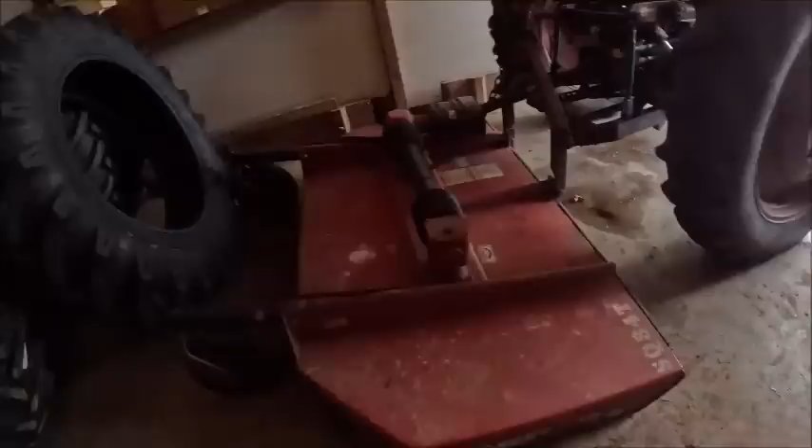Hold on. Okay, I need to get that thing out of here and get it over to my house now that I got room, and then obviously the best thing to do with these tires is get them on the tractor, but we need decent weather for that.

My original plan before the snow happened was I was going to get the mower put on this thing, get that taken care of, and then run it home, hook on the grain drill, and pull the grain drill back. Well, now with the roads wet, I don't want to pull the grain drill over there or over here with the roads wet, and I don't want to take the mower over there with the roads wet and have it wet and rusting. So probably not going to be doing that today, so I'll have to figure out a way to stuff it back up in here all hooked up for the time being.

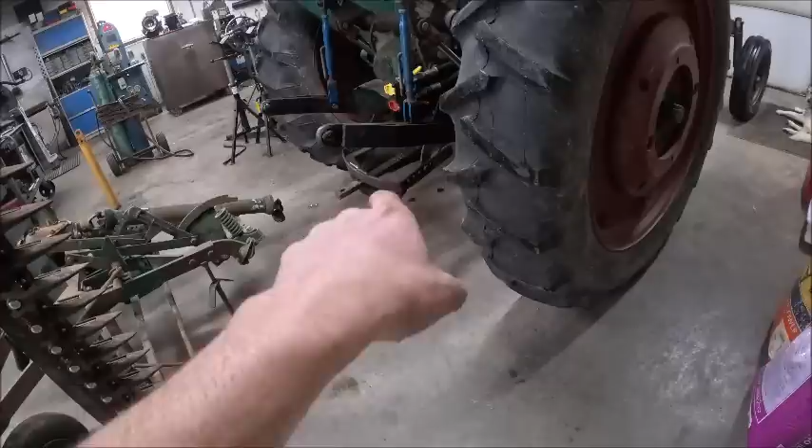Okay, so hooking this up to the tractor is pretty straightforward, although I think I'm going to have to make 2 changes on the tractor in order to make this work. I think I might have to move the supports back for the drawbar cradle and level the drawbar out, because right now it's tipped down.

And then I think I'm going to have to, right now, and I don't remember the exact situation why it ended up that way, this has a drawbar in it out of a 60, and it's shorter. Do you remember why we changed the drawbar in this thing? I know it came out of that 5-speed.

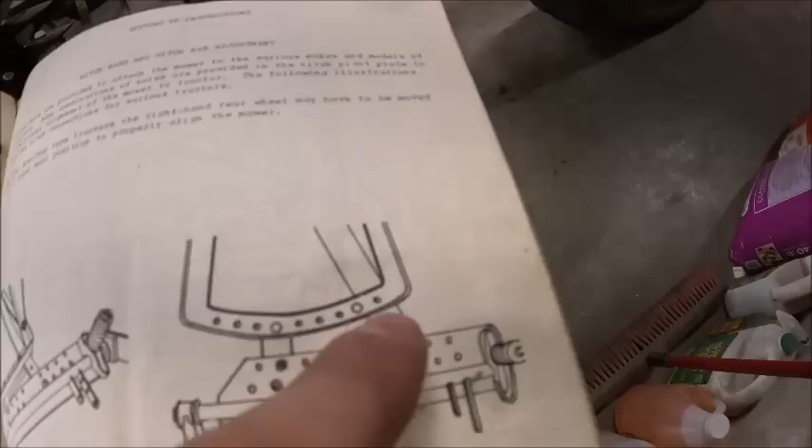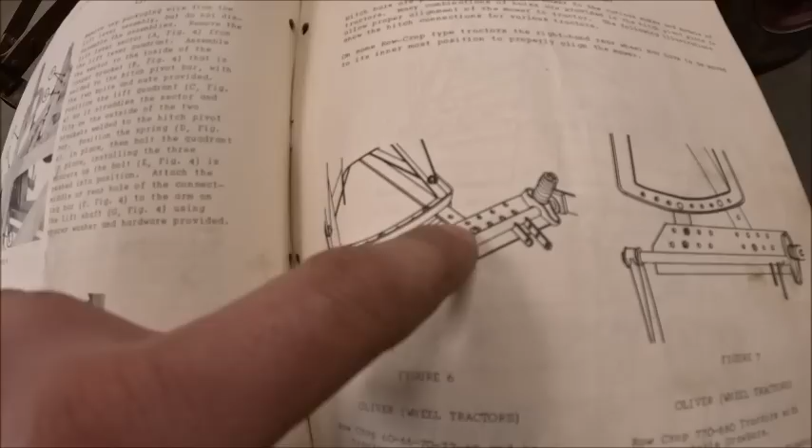But I can either take you on the 66 and show you, or I can just go get, I think that Super 88 we got's got a drawbar in it that I can throw in it. But if you look here on this illustration, the drawbars on the Fleetlines and the Supers and the 3-digits had 2 holes in them because there was an option for a hammer strap on these drawbars. Don't really see it, but there was an option. And the drawbar is longer.

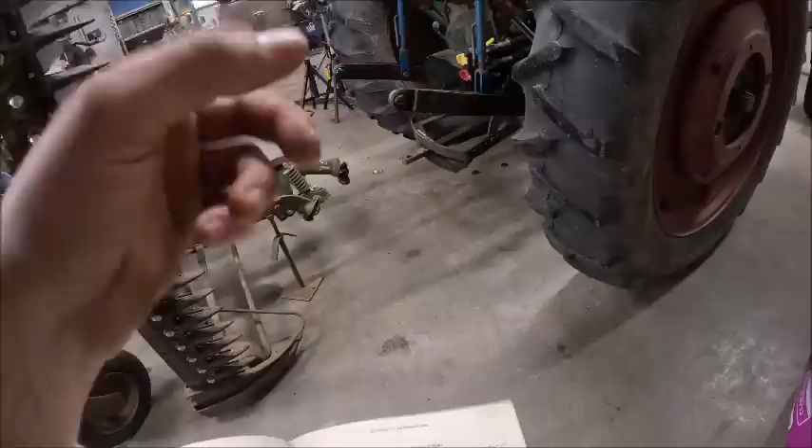So in order to get the mower straight in line with the tractor, you've got to have the right drawbar in it. So I'm probably gonna have to throw the right drawbar in it, or I think that Super 88 we got has a drawbar in it. If not, that Super 77 we have should for the time being. So I'm probably gonna have to throw the right drawbar in it and get the cradle leveled out.

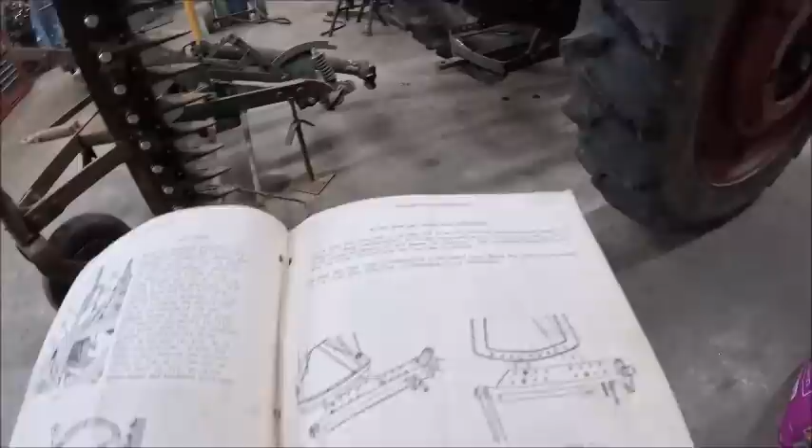But this is how it's set up for the Fleetlines and Supers, and then the 3-digits have a different setup, which I believe the 3-digits had a wider drawbar strap, and then they had more holes in the drawbar, so that's why it requires a different setup. But they got all sorts of stuff.

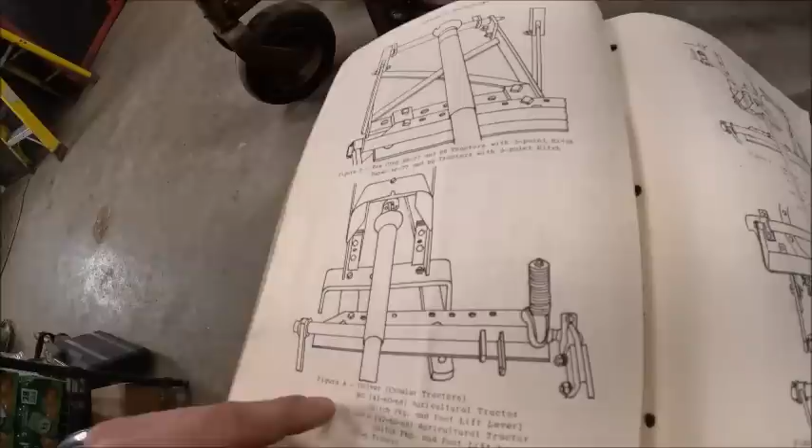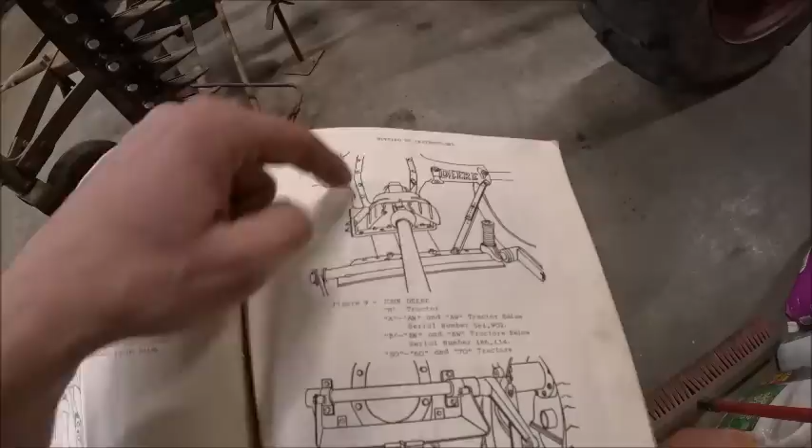There's a setup for the Fleetlines and Supers with 3-point, HG, OC3, OC6 crawlers, John Deere's — I'm assuming that's... well, it says all this stuff below serial number, but then 50, 60, and 70 tractor, but that looks like the back of an unstyled Deere. So you wouldn't think that would have a whole lot in common with a 50, 60, and 70, but apparently it did. Allis WD, Allis CA, Farmall Super C.

Well, John Deere A and B, BW, I'm assuming that's the styled A's. Oliver Super 44 with a swinging drawbar.

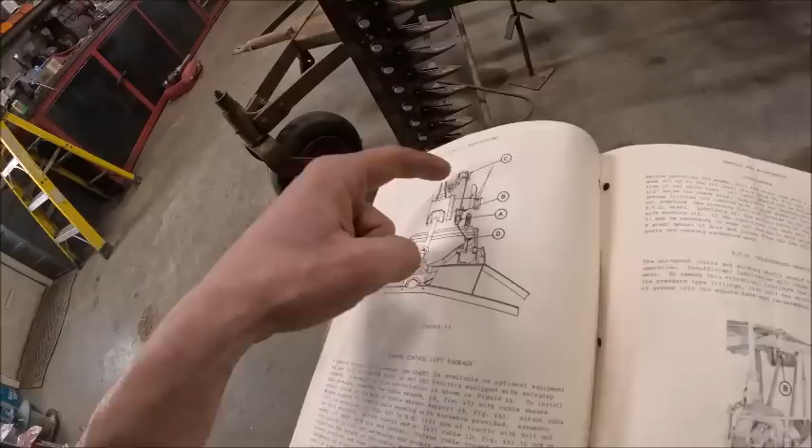And then that's a Super 50, that's the remote lift for a Super 55. Basically, you took the 3-point apart and used the rock shaft. It had a bracket they put on it that ran a cable back to the lift, and you used the 3-point rock shaft to lift and lower the mower.

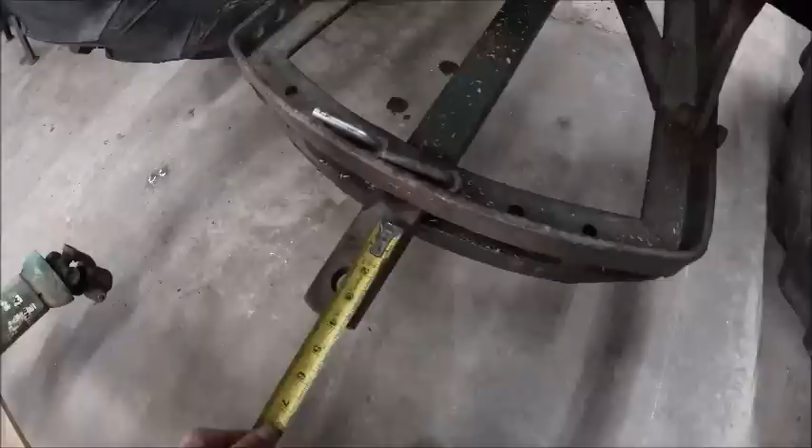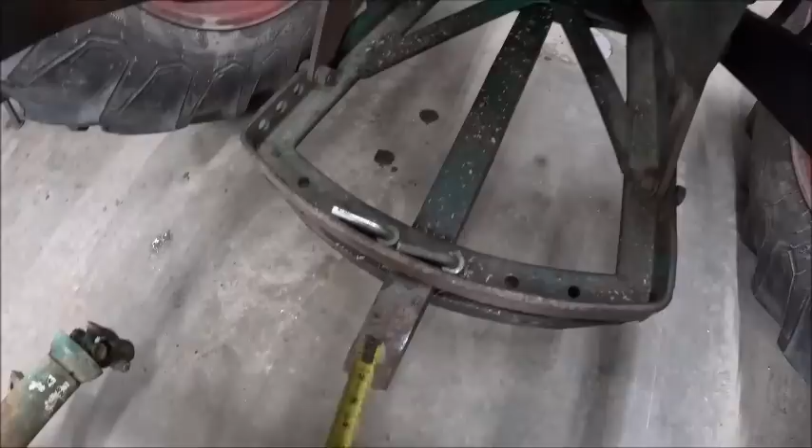But anyway, that's what we got to do first, is get the drawbar in this thing situated. So for illustration purposes, the drawbar in this one is basically the tip 5 inches behind the cradle. It actually has a position in it. You can slide it in one hole, and it basically puts this hole right here.

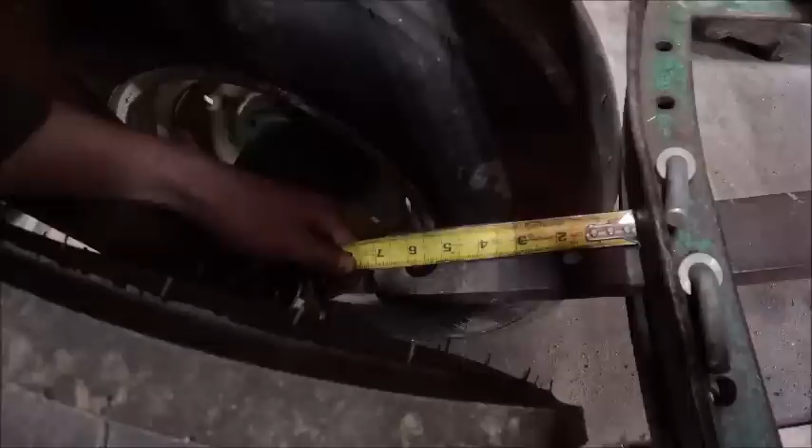So now I can go show you on the 66. It's kind of hard to get in here because of how I parked it, but the drawbar on this one is like 7 1/4. So you're basically 2 inches longer on that drawbar.

Unfortunately, that Super 88 did not have a drawbar in it, just the cradle. So I really wish I knew where the actual drawbar for the 77 went. I know we wouldn't have got rid of it. I'm pretty sure we threw that one in there for something to do with tractor pulling.

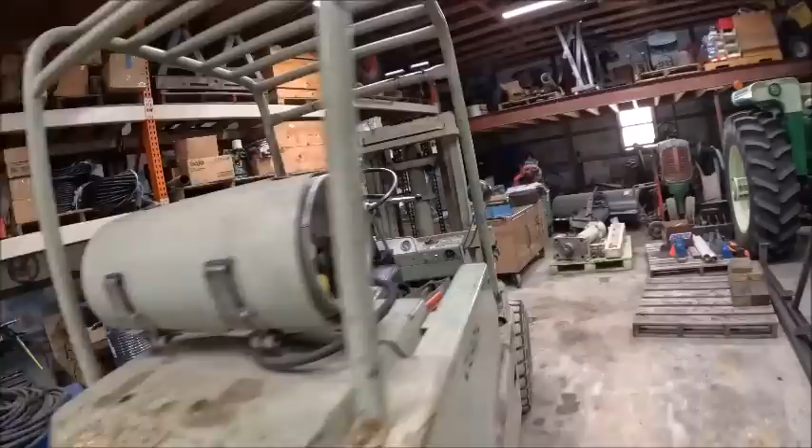So if nothing else, it might be a little bit of a chore, but I should be able to get one out of that Super 77 back there for the time being.

Well, hell, that wasn't even hard at all. Apparently we had pulled the pin in it and shoved it into the cradle to get that thing closer to the wall, so there wasn't even a pin in it. I just had to reach up in there and slide it out.

One of these days we'll get that tractor going. One of these days. It needs to move up on the list, but unfortunately it's a long list and there's more important stuff in front of it.

Okay, so I got that Super 77 drawbar in, and I got the cradle leveled out. I just had to move it up, or move it back one hole. So with the drawbar set up, swung over like that, we should catch in the drawbar that bolt hole, that bolt hole right there.

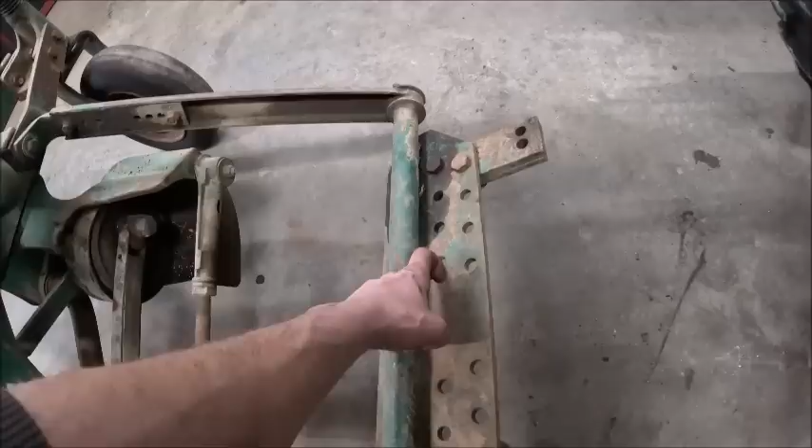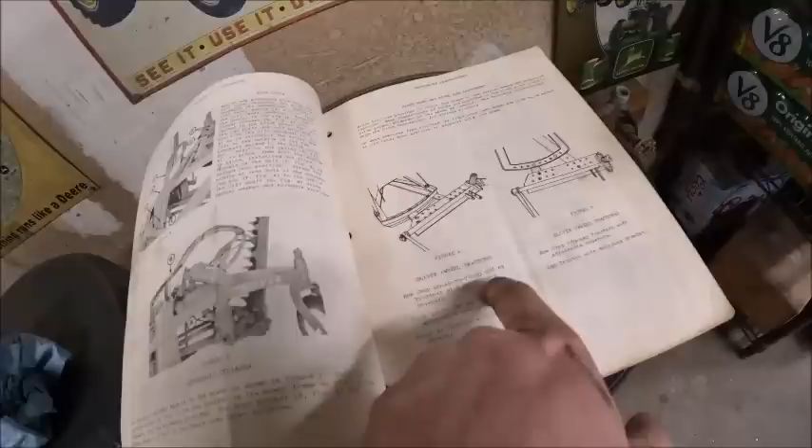And then this is already where it belongs, which he ran this on, I think they ran it on their 80 and I think they ran it on their 77. So in theory, it's pretty much set up the way it needs to be, because actually the only tractor it doesn't mention here is an 80.

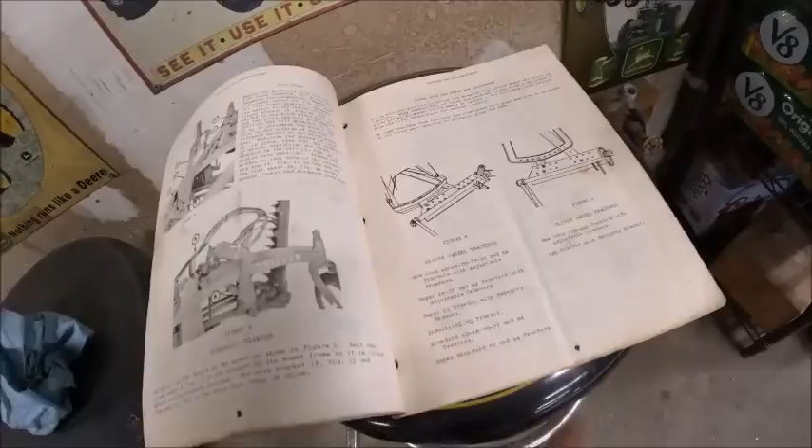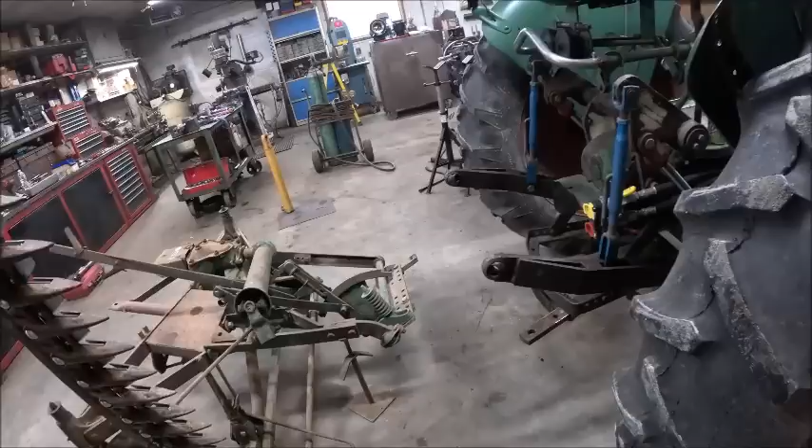Interesting. 60, 66, 70, 70. Oh, right there, 80. Okay, yeah. Because in theory, other than pitching the bar, since tire size is going to make a bit of difference, once this thing's set up for this, it should fit a 60, it should fit a 66, it should fit a 70, any series that uses this cradle or this drawbar. If you put it on a 3-digit tractor though, because they changed the drawbar cradle and everything, you'd have to move that bracket. But once it's set up for this, it should fit a Super on down.

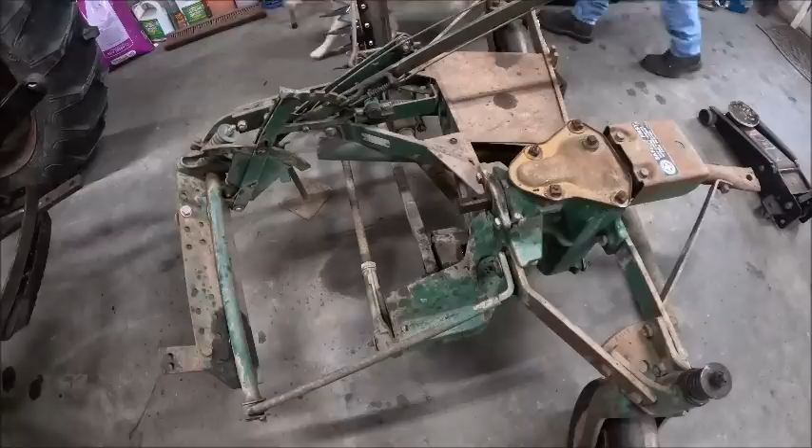Well, I decided I was going to take the PTO shaft off just to have one less thing to juggle on this pool noodle while trying to hook it on the tractor. And I was like, surely it can't be that hard. The pin moved and everything. When I started driving it out, it went like 1/8 of an inch and jammed. You drive it the other way, it'd go like 1/8 of an inch and jam.

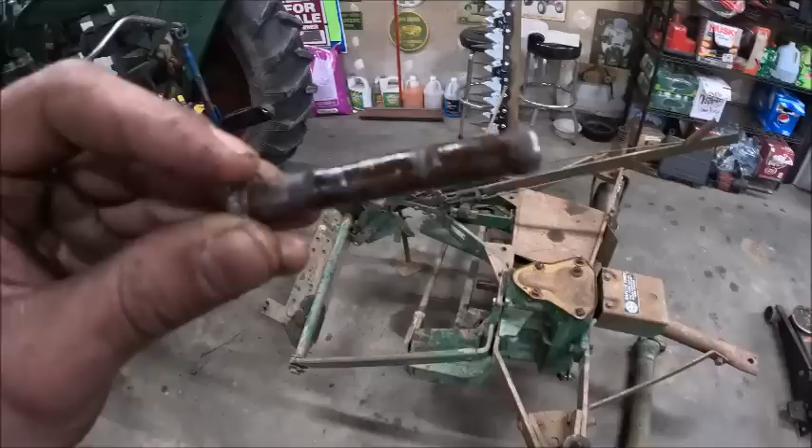Hold on, which way is it? It was trying to shear the pin, so it'd go far enough that it'd wedge itself. And man, I'm starting to sound like I've been smoking 2 packs a day for the last 20 years.

So you have to replace that pin. But I think they just had this in there with a cotter pin in it like normal. I think when I put it back together, I'm going to put it in with an R pin, so that when you do park this thing, you could pull the pin, take the PTO shaft out, set it aside, because this thing is a bear to hook up, and not having the PTO shaft in the way just makes it that much easier.

Anyhow, I'm going to go get me a snack and then we will continue.

Okay, so this part, hooking up a mounted mower like this kind of sucks no matter what you do, but it's not as bad as it appears normally when you have more room. Hold on. So I'm trying to make do with the room I've got here. But basically all I gotta do is scooch her over a little bit because we're too far this way.

Okay, that kind of helps steady things a little bit.

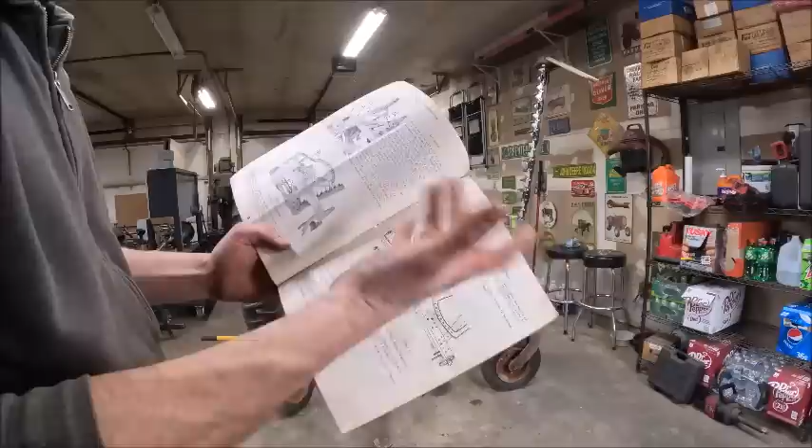So we need to be in the third hole over in the drawbar, or the third stop hole over in the drawbar cradle, right there. So it's just a matter of shuffling around until you can get it where it needs to be, which sometimes is easier said than done if these drawbar cradles have been pinched shut at all. Hopefully we don't run into that issue.

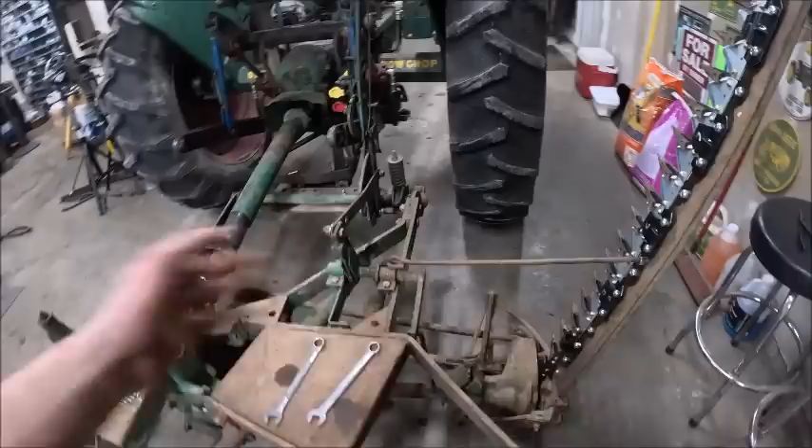Right, so before we take this thing out and lay the bar down and start checking squareness to the tractor and whatnot, I want to get it. Man, I wish my voice would come back. It wasn't this bad this morning.

I want to get more lift out of the cutter bar, because right now when the bar is laid down and you pick it up, if it comes off the ground yay far, I'd be impressed.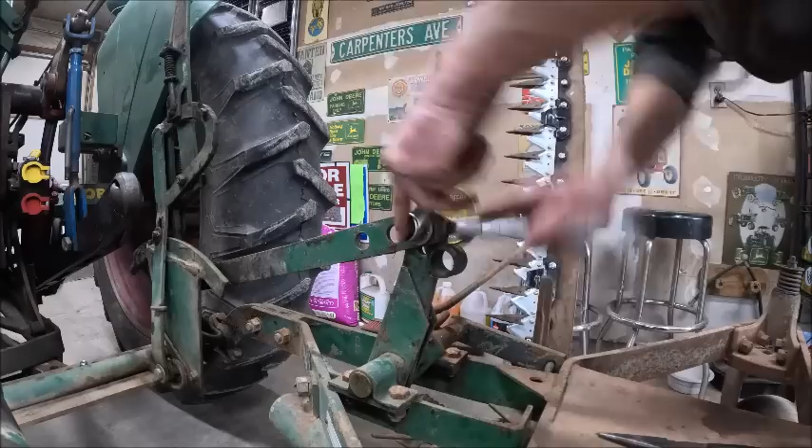Although this is probably all for nothing, because I think what I'm actually going to do, since I know where there's a parts mower that has the parts I need, I am probably just going to end up converting this thing to hydraulic lift.

Not really because I think there's anything wrong with the hand lift, but especially here on the 77, we've got all the stuff in the way on this side for the 3-point. And there's just a lot of knuckle knockers.

So making it hydraulic would make it... I don't know, on one hand it would make it handier, because then it really wouldn't matter which tractor we put it on. There wouldn't be anything to necessarily interfere with the lift linkage anymore.

But then you would have to have it on a tractor with hydraulics, because right now with this, I could put it on a 60 if I wanted to, or I could put it on the Hart-Parr if I wanted to. Not that you're going to want to take a steel wheel tractor out in a hayfield, although technically it would aerate it and mow it at the same time.

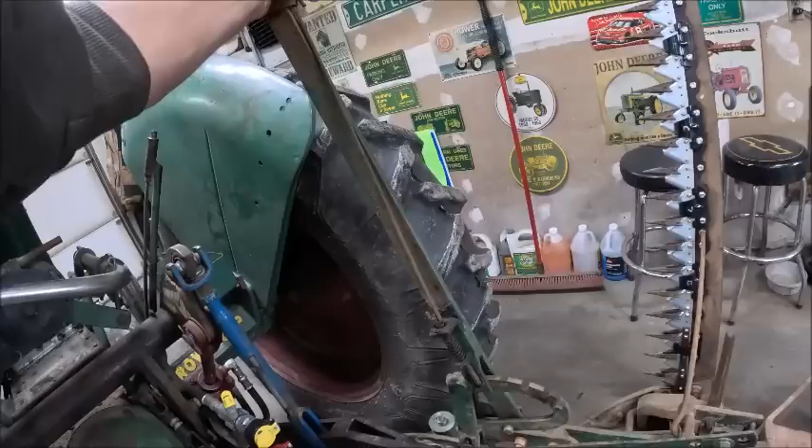I could put it, if I really wanted to—I think you could even, because of the way they design this lever, you've got this adjustment here so you can adjust where the lever is in relation to the seat on the tractor. And then you've got your actual main latch that raises and lowers, or that latches the bar in the up position.

So I think there's actually enough adjustment in that, if I really wanted to, I could run it on the Super 55 with the hand lift. But ultimately, I just want to get a remote valve set up on the Super 55 anyway, so.

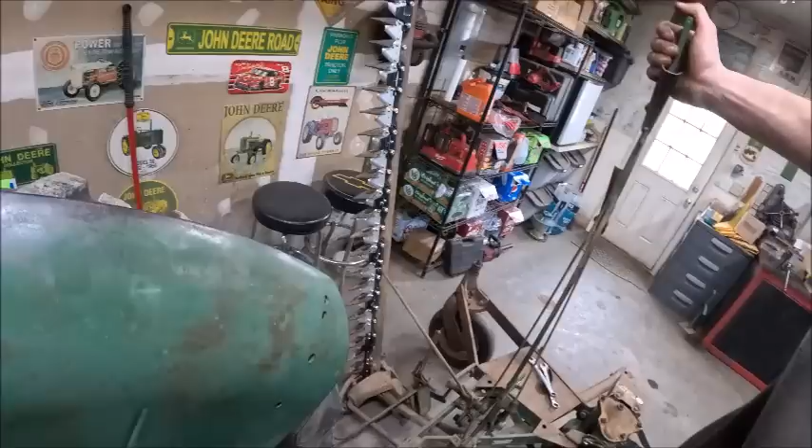Okay, what are we hitting? Huh. Interesting. So apparently there is something in the linkage that physically won't let it come up any higher than that, because I'm coming up against something hard. Actually, it looks like...

Sure as shit, right there at the bottom, it takes all of the stroke out of the lift assist spring. So at that point you're trying to compress a tension spring, which doesn't work. So I guess my lift height kind of is what it is, and I guess we'll have to play with that linkage down on the bottom and get it to where it picks up the end of the bar more.

Because my big thing is, when you turn it on the end rows, I don't want it to be dragging. I don't want it to be obviously dragging hay.

So yeah, I guess I'll put it back where it was. Well, I guess we don't have to really mess with how high the bar picks up, unless I just didn't have it. Unless the drawbar on my 66 is a notch lower, because when I had it on the 66 to take it over to my house, the end of the bar was right down here, but that right there is just about perfect.

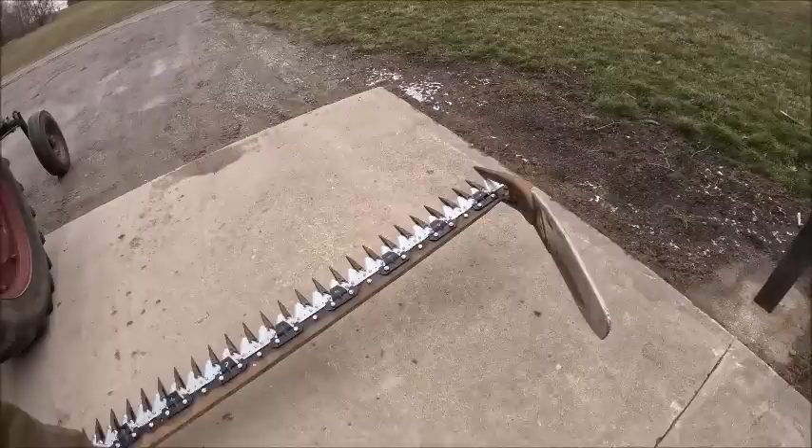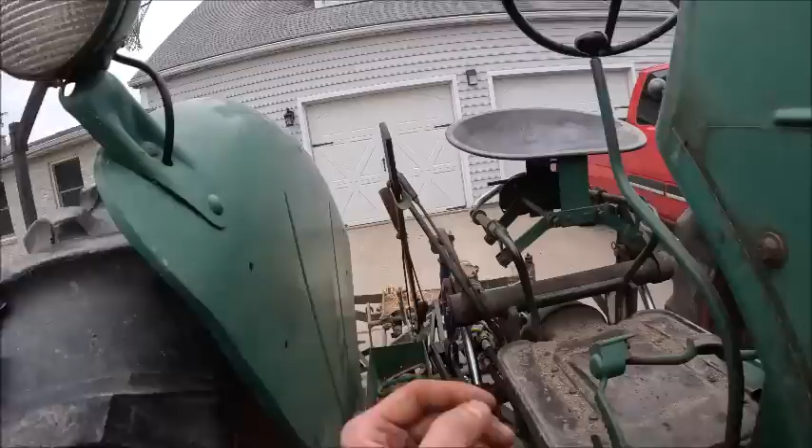So anyhow, basically now what we want to do is make sure that the lead angle, meaning the relationship of the bar in relationship to the tractor, is correct. And the book calls out for, on a 7-foot bar, a 2-inch lead angle. So basically what we got to do is, first things first, set the bar down.

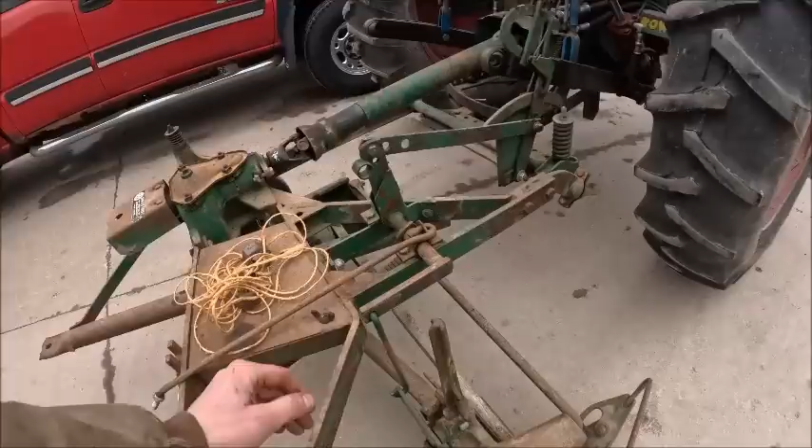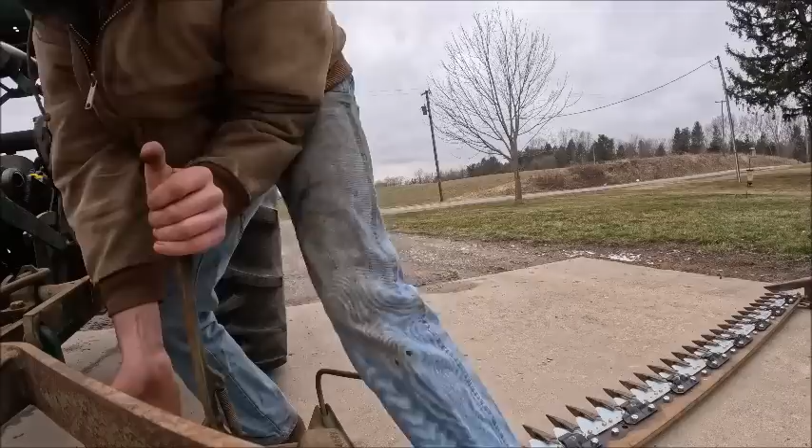And it looks like I need to tilt it forward just a hair. This adjustment's a little stiff. Come on, damn you. Well, it was stiff, but it wasn't. Oh, wait. It's because I'm doing it wrong. Hey, look at that. Okay.

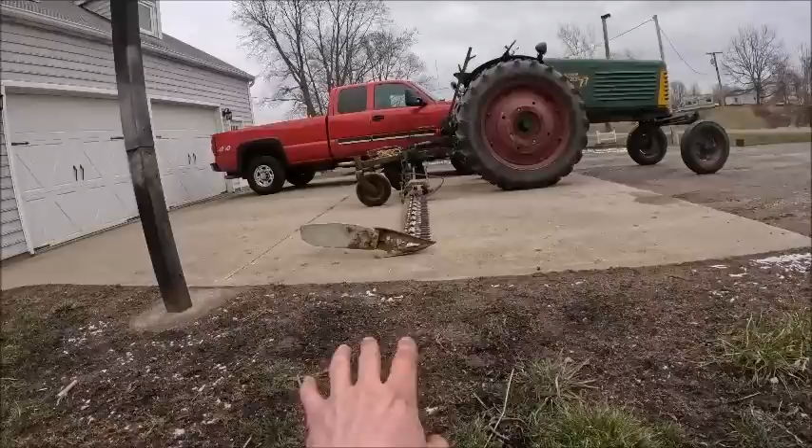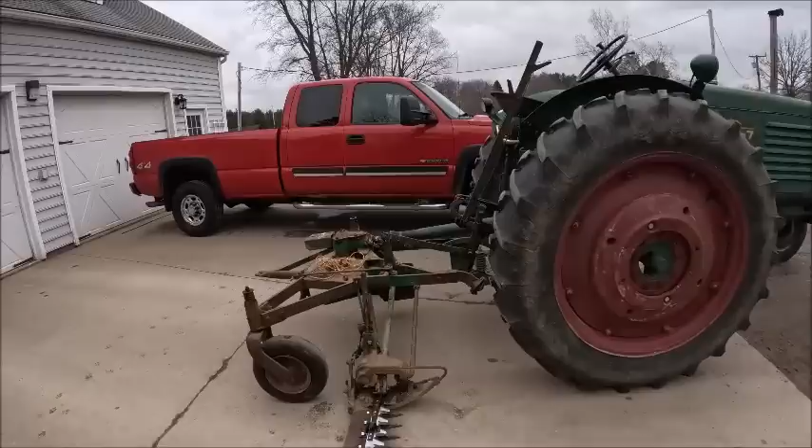So that gets the bar just about right. You want a slight - the book says slight, it doesn't explain what slight is, but it says you want a slight upturn on the guards, which it looks like we've got. Actually looking at it, of course the front of the tractor is down a little bit, so that doesn't help, but honestly it looks like the drawbar could come down almost back to where it was, but I don't know. Everything works better where I got the drawbar.

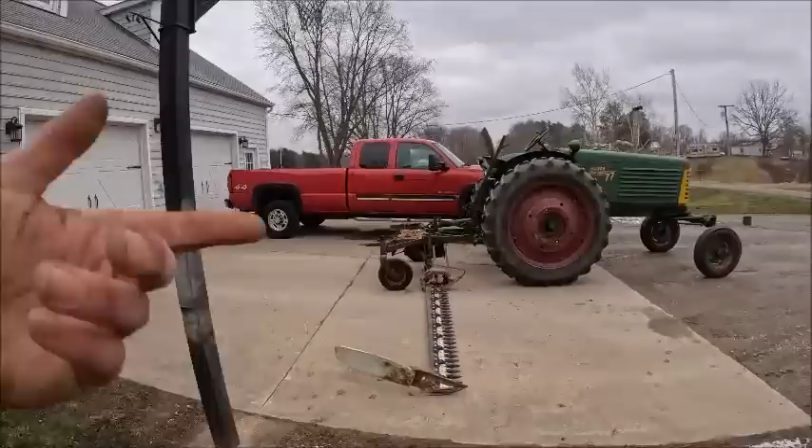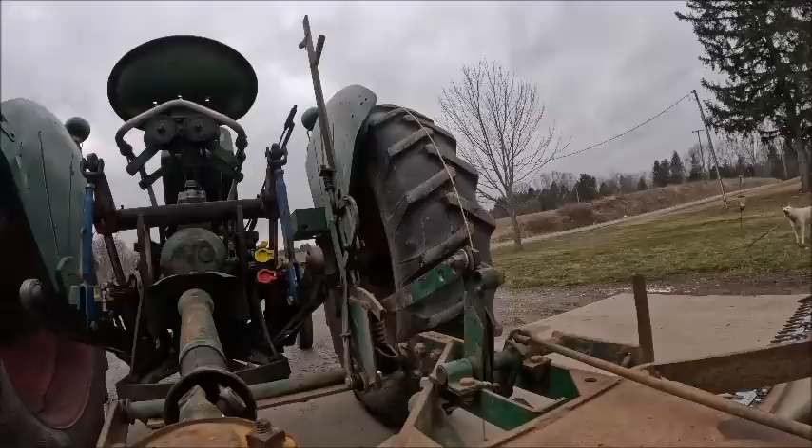So now that we're here, I made these plumb bobs, and this is all doing it by the book. The book has a diagram with these things in it, the whole 9 yards. You go over the tires like so. You do that there, and then you do the other one, and you get it over the crown of the tires like that.

And then you need a straight edge, which I'm going to use this piece of rebar I found that I think is long enough. And basically by going over the crown of the tires like that, the plumb bob gives you a straight line across the back of the tractor, once everything settles where it wants to be.

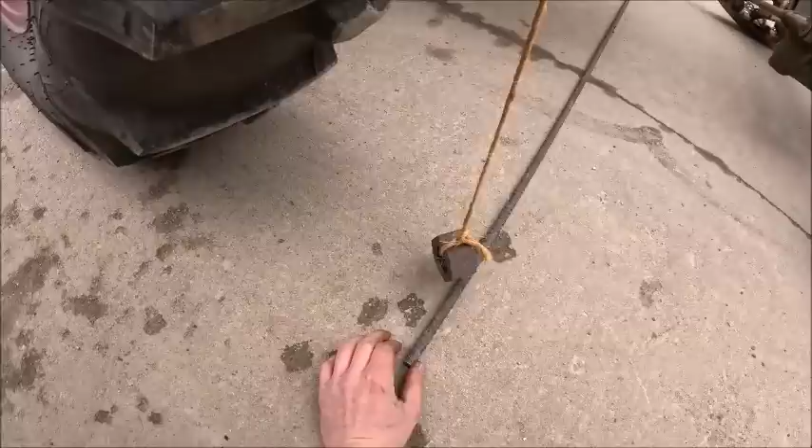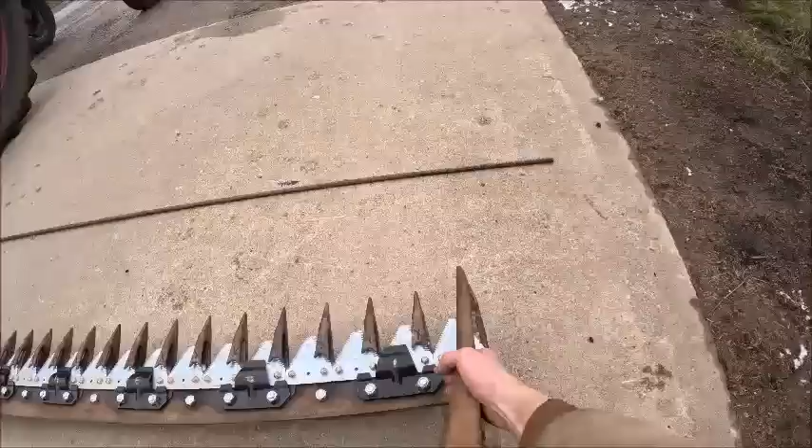Make sure we're centered. Kind of want to look at the string more than the nut - the nut's just there for weight. And then you got to come to the end of the bar and pull it back as far as you can get it to go, to pull all the slack out of everything. I don't know if my voice is going to make it through the end of this video.

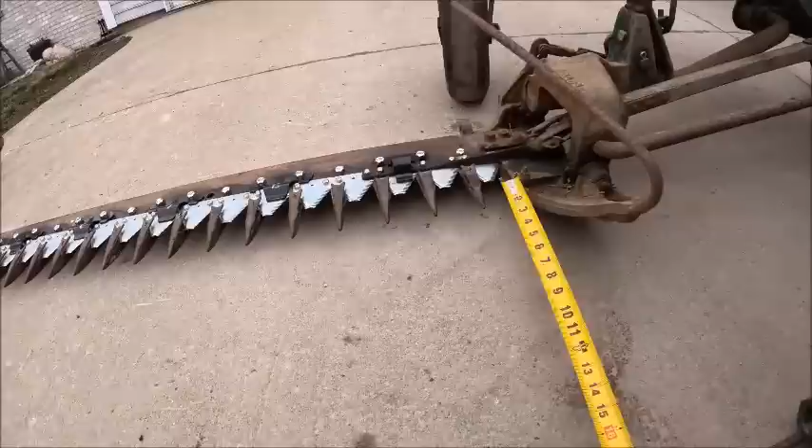Basically pulling that back pulls all the slack out and simulates the mower having pressure on it from mowing. And then I gotta grab a tape measure. And then what we want to do is they want you to measure off of the very first knife - we've got about 21. And when you come to the very last knife, we are at 22.5.

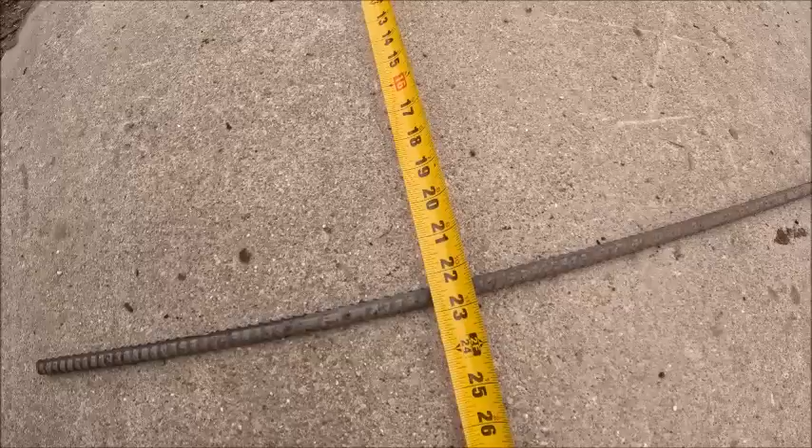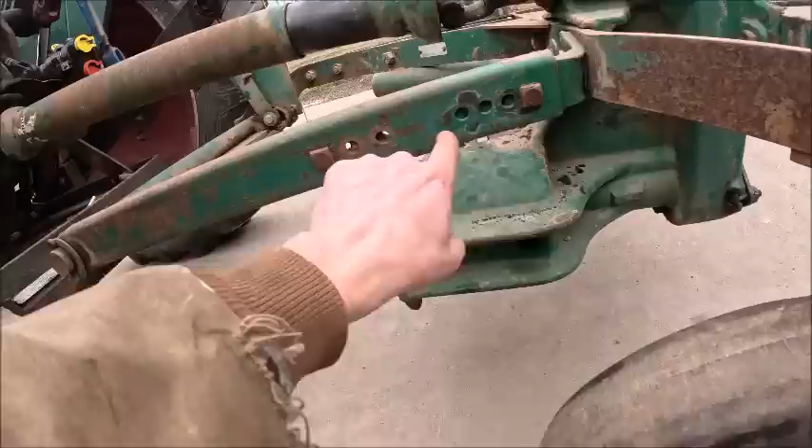So the mower is actually back too far, which is not what we want. So in order to adjust that, we come out here and we move these bolts, which it looks like - actually judging by the wear marks, at one point it was actually in that hole and that hole. Although it's odd, there's a wear mark there and there, but there's only a wear mark there on the back. But anyway, if we lengthen this, then that will swing the bar forward.

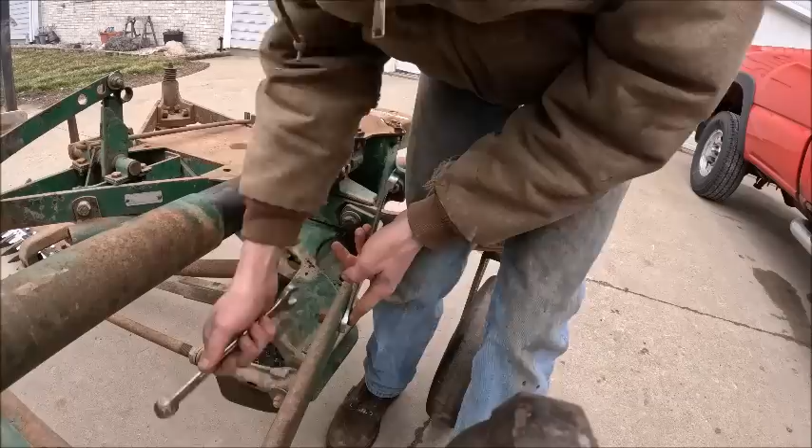Some of the grease, can't get the wrench on it. Now I'm gonna guess if we only go forward basically half a hole, should be plenty, I would think. You translate that over 10 feet, whatever it is, that's going to be a fair bit of movement.

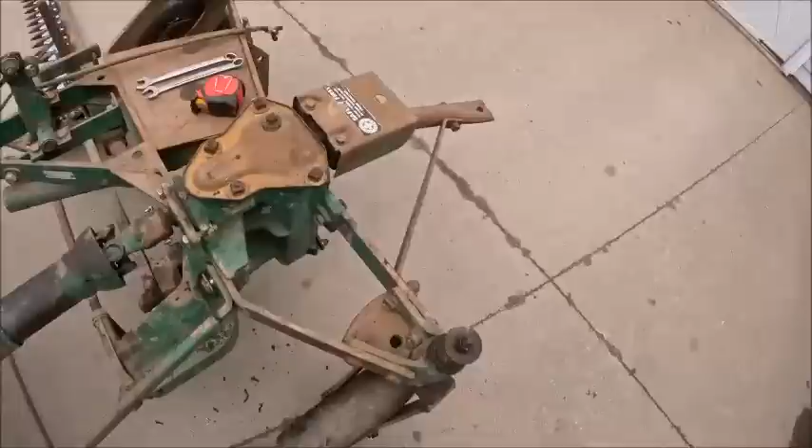Okay, so we'll come back over here. I want to yank this back again just to make sure. Need to readjust. Hold on here. Okay.

Back over here, we're now at 20 and a half. And down here, we're at 20 and a half. So now we're even. So we'll give her another half a hole, because that basically moved it about 2 inches - about 1.5 inches, because I thought it was 22 or something like that the first time. All right, lead angle set. Had to move it a fair bit more than I thought. I had to move it 2 more sets of holes to get it to the 2 inches. I got it at 20 1/4 on the inner and 18 1/4 on the outer, so it's 2 inches on the nose.

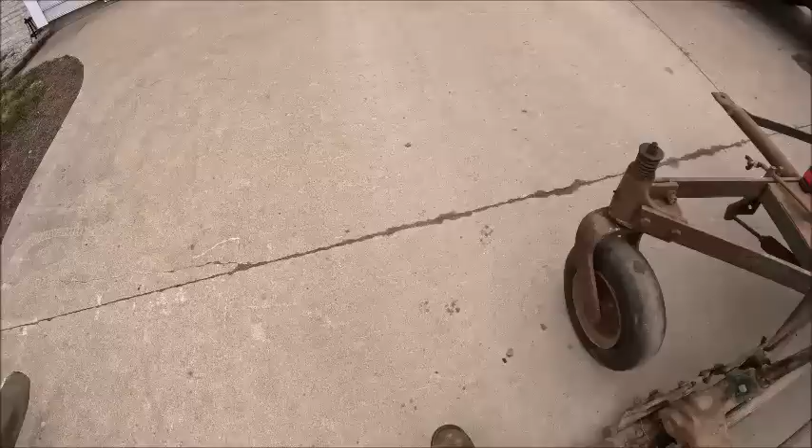So, with that, I think we're pretty good. I'll get my stuff out of the way here real quick and we'll run her up and see what happens. All right, let's see if she'll run under power. Yeah. Can't fit in there with my coat on.

Come on, girl. Sit outside for 2 minutes and you want to throw a hissy fit.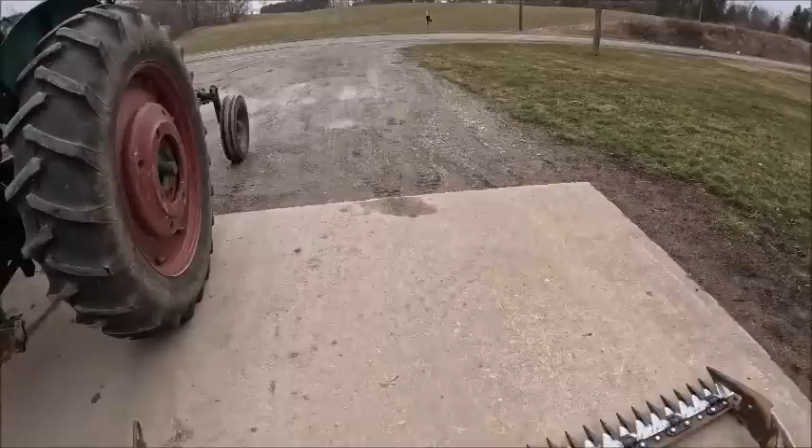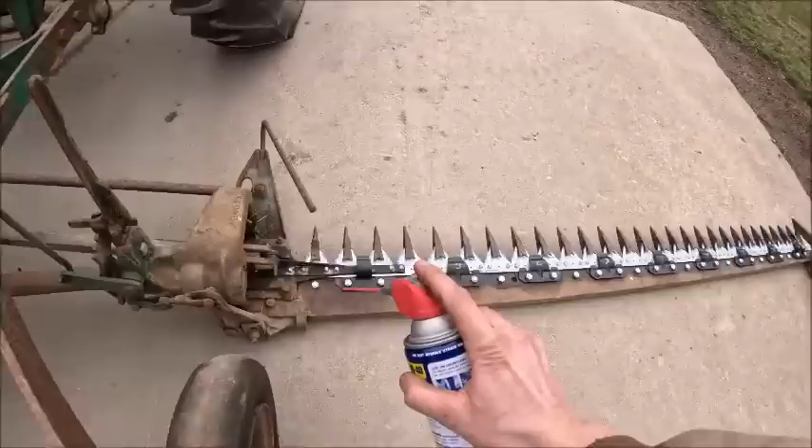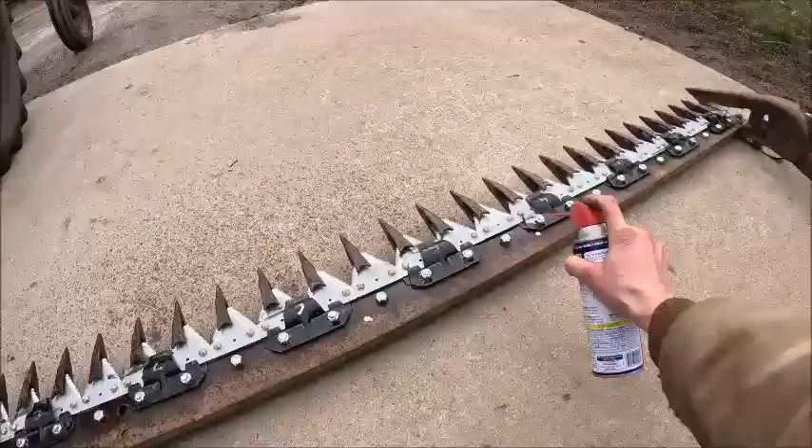Nice and quiet. It's actually really quiet. Really quiet. I'm impressed. Table's not out here anymore.

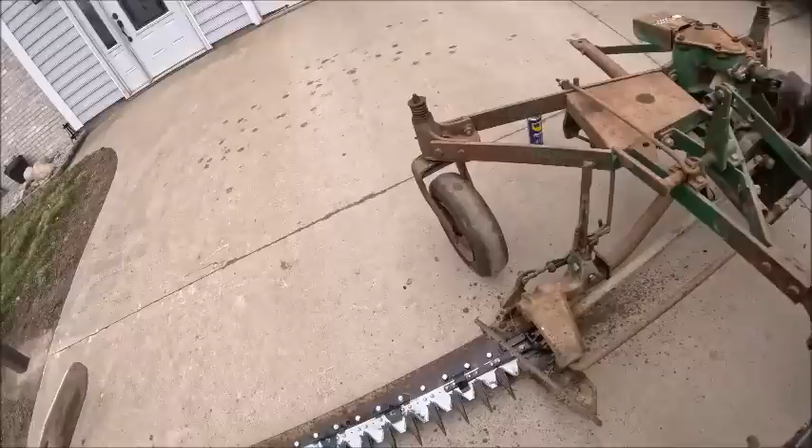Well, it must have limbered up fairly quickly because you shut it off and it'll actually coast to a stop. It's not like it goes and stops, so it must move fairly freely. Now I kind of wish I had some hay to cut, but it's kind of hard to do that in February, huh?

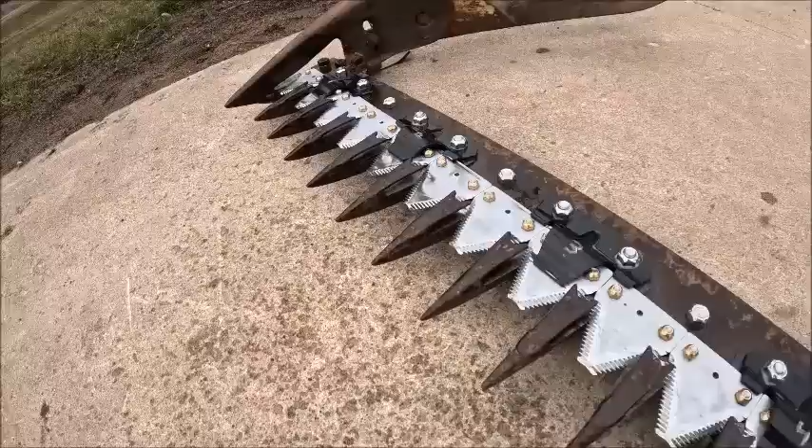Don't really see any nasty rub marks. I think she'll be all right. So I guess, with that being said, we're gonna call her square. At least for the moment.

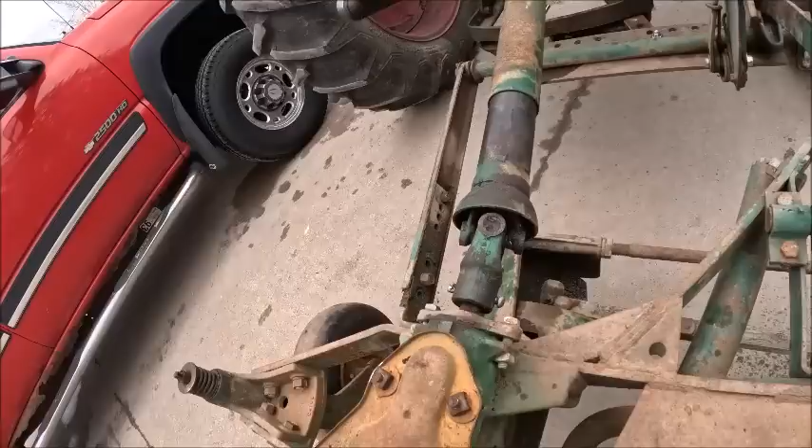Obviously I gotta go get another pin for the power takeoff. It's just a 5/16 by 2.5, should be a fairly standard PTO pin. Which, that being said, other than I'd have to make sure I get one with a round loop so it couldn't catch on anything, a regular PTO pin with the spring latch on it might be a good candidate for that. At least that should be a hardened pin.

When I get a parts book for it, I'm going to see about getting, probably won't end up finding one, but you never know. I never figured I would find the parts to rebuild a cutter bar like I did. See if I can find a new old stock grass board, and well, I'll just get the book and show you what I'm looking for. So hopefully get a parts book for it so I can get some numbers, and never hurts to ask. I might get lucky and find both those pieces new old stock.

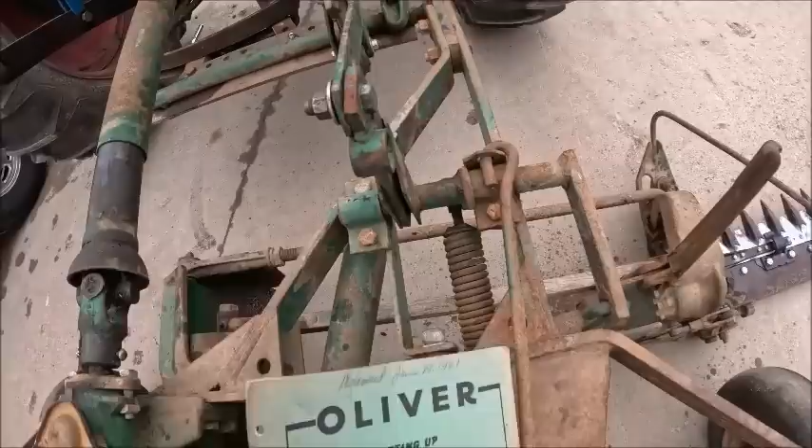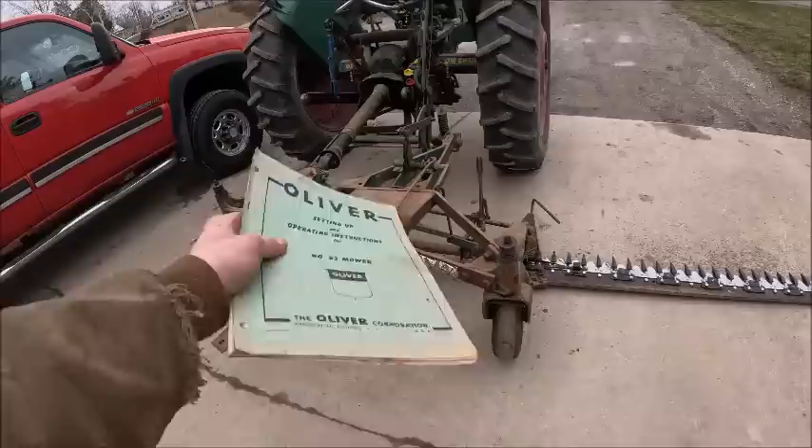Same thing, I'd like to see if I can find another spare pitman arm, just to have on hand, because sure as shit, first time I go to use it, that one's probably gonna break. But if I can't find a new old stock one, we'll take that one apart and make another stick for it.

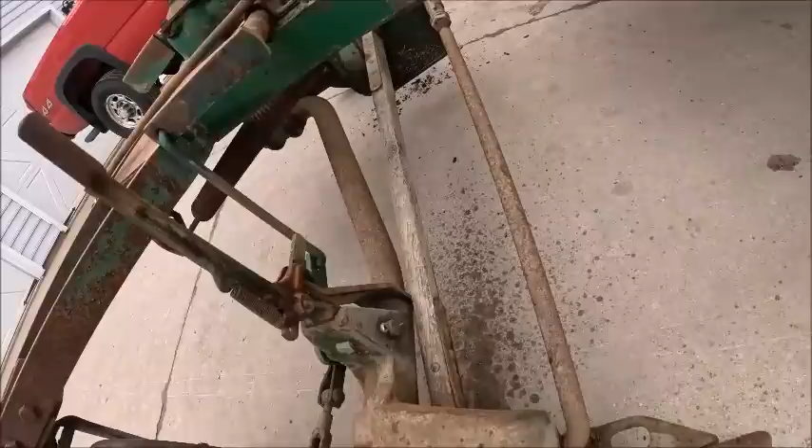I think they normally made those out of something like hickory, but I don't know. You wouldn't want to necessarily use a hardwood, because then it wouldn't snap like it's supposed to. If the safety fails to snap open, you kind of want the pitman arm to break so that nothing else breaks.

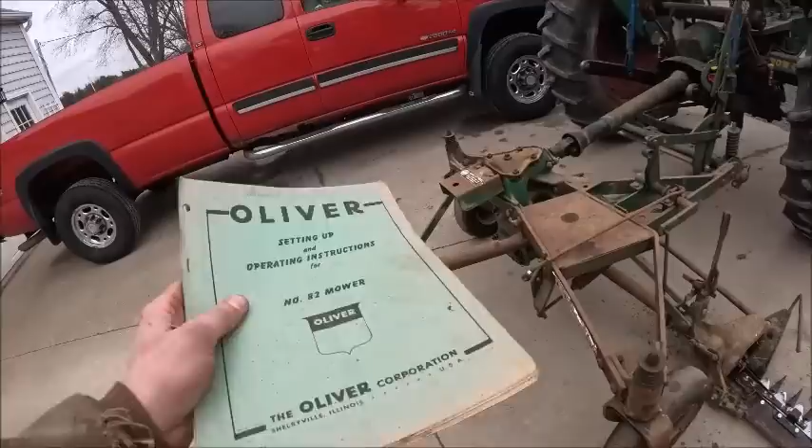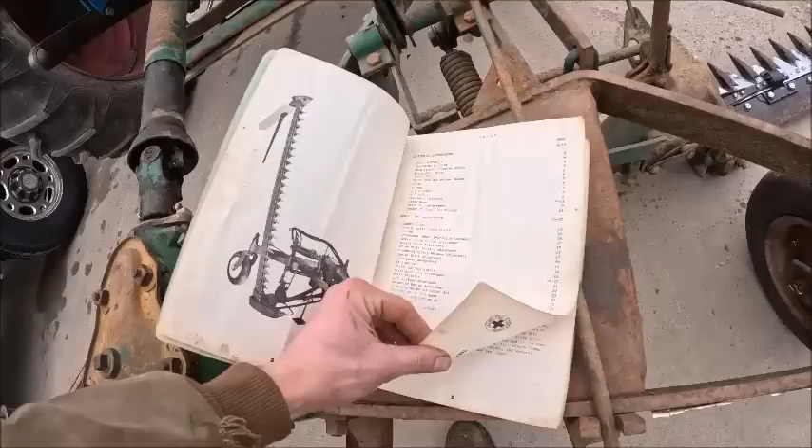So that's basically what I got left to do. And obviously if I get time to go get the parts for the cylinder conversion, which is basically all it is, it shows the cylinder setup in here somewhere. Yeah, there's a better picture of it than that.

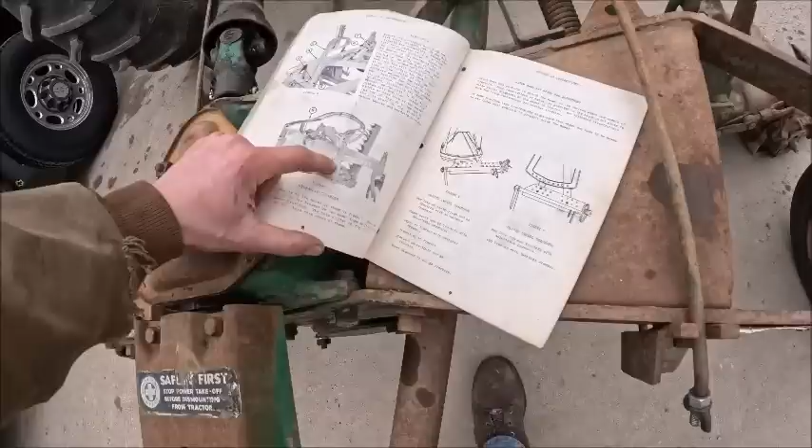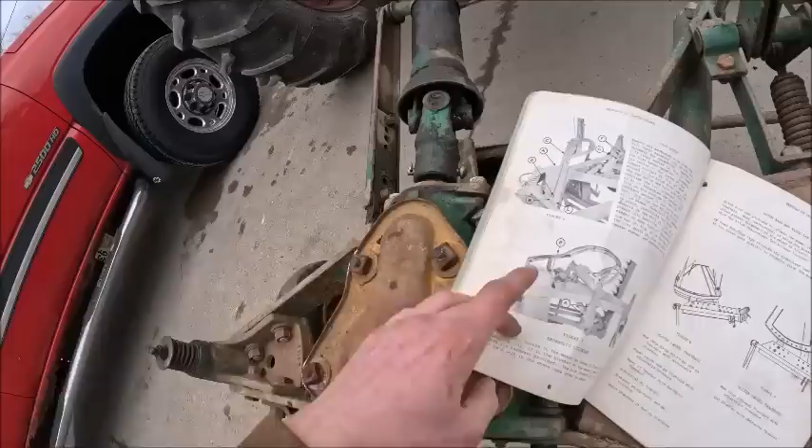Bear with me here. Right there. There's a bracket that goes right here in these two bolt holes. And what else did I see that was different? Oh, and then you need the hose holder, which goes on that bolt right there, it looks like. And then you just take the lever lift linkage off.

Oh shit, here comes trouble. Alright, sorry about that.

So anyhow, I stepped in the shop for so long I forgot where we were at, but basically I think I was pretty much done. So yeah, I guess with that being said, I'm gonna see if I can hopefully manage to stuff this rig up back in the barn and still get the door shut. That would be nice, so I don't gotta unhook it for the time being.

And I haven't decided what I'm going to do tomorrow yet. Weather's supposed to be nice. I got to get this thing back over to my house if the roads are dry enough, and get the grain drill drug over here. And I really need to get the injection pump pulled off the 1955, because I really got to get that thing down to get rebuilt if I want it back on the tractor before spring. So, and I might have a line on some shelves put down in the barn to put implements on, so I might go get those tomorrow.

So I got a lot of stuff to get done, so we'll just have to see how things unfold. But anyway, I guess we'll have to see what ends up happening. So that's it for this one. We'll catch you guys on the next one.